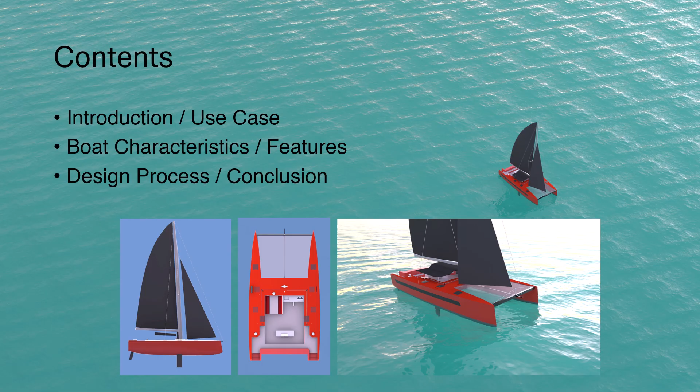Hello, everybody. My name is Graham Denning, and today we're going to be going over my Denning 45 Performance Sailing Catamaran as my final project for Yacht Design 2025. The contents of the presentation will start with the introduction as well as the use case for the boat, then we'll go into some defining characteristics and features of the boat, and then we'll talk about the design process and sort of a debrief and a conclusion.

So I wanted to do a multi-hull. We hadn't done a catamaran this year, and I wanted the challenge. I wanted that design experience, as we've done a pretty good job getting everything else that seemed like the last thing to cap it off. And I've also done a little bit of cruising on a catamaran, and I really enjoyed that and wanted to do my own take on the sort of tropical weekend warrior boat. Some of the boats that I had on my parametric study were the Outremer 45 and the Gunboat 48, which are both performance cruising catamarans, and that was the genre that I was going for.

My use case was a sailing catamaran for extended island cruising or tropical day sailing that small families or two couples could sleep on comfortably for a couple days up to a week. And the ideal user is somebody that can appreciate the art and the sport of sailing without having to have every single creature comfort in the world.

And some of the core characteristics that I wanted to keep central to the boat's design was a very performance-oriented hull and sail package, as well as appendages. A pretty basic system suite, not overly complicated, but enough to be a modern vessel. And then the ability to be shorthanded is also key.

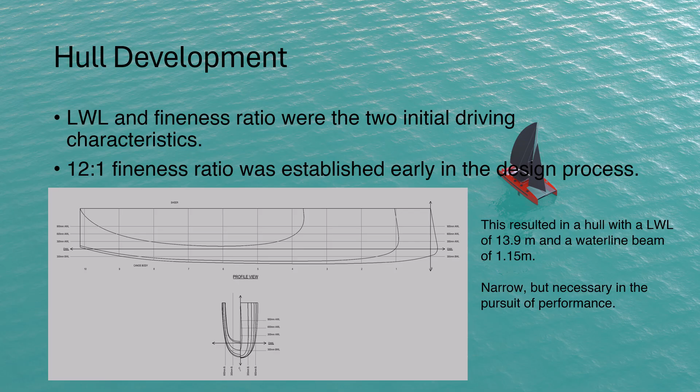Moving into the hull development, the length of the boat, which I wanted to be around 45 feet, and the fineness ratio, which were the two driving characteristics. I decided on a 12-to-1 fineness ratio, as any higher than that, the performance you gain for the interior space that you lose does not make sense for a cruising boat. And this resulted in a hull that's 13.9 meters long with a waterline beam of 1.15 meters. And it's pretty narrow, but as you'll see later in the presentation, it works and it ends up with a pretty high performance ceiling.

For the sail plan, I wanted something large and easily managed for the shorthanding, but also for increased performance. And the key to this is the large mainsail, but also the self-tacking jib on the front, which allows for much easier shorthanded sailing as the jib tacks itself, which reduces the need to mess with jib sheets while you're trying to do 15 other things if you're sailing by yourself or with limited help.

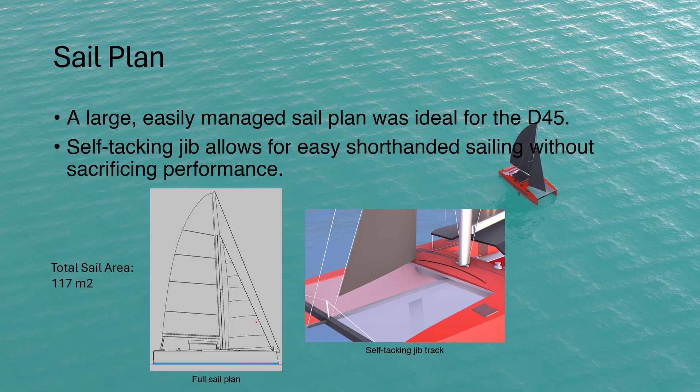The next aspect are the dagger boards, and I chose dagger boards over mini keels as they have a much higher performance ceiling. And each dagger board is operated by lines that move it up and down depending on the current tack of the vessel, and they can also both be pulled up if you are motoring around in shallow water or if you're going to beach the catamaran in order to have a tropical picnic.

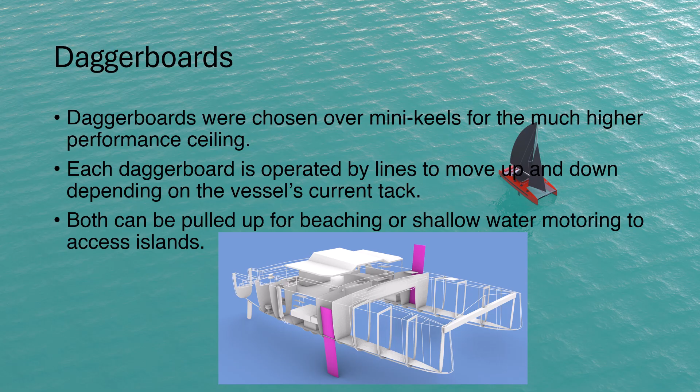Sort of a cool feature that's pretty limited to catamarans is the idea of a rotating mast. And the rotating mast has a wing shape in and of itself, and it offers a lot of benefits for catamarans that can't point necessarily as high as a monohull. It allows for a more optimized sail shape, allowing for much easier airflow. And like the dagger boards, it is also controlled by lines for the specific tack.

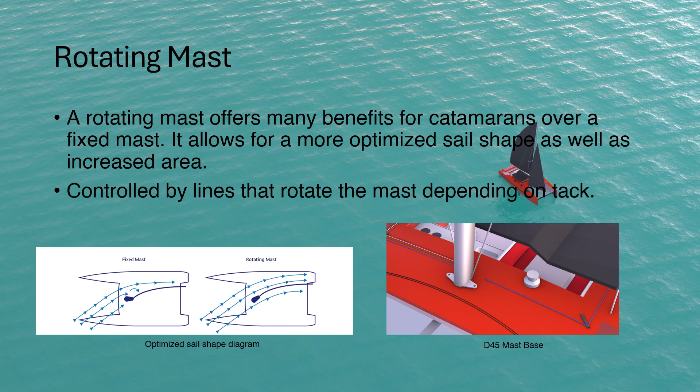For the engines, I picked two Beta 30 horsepower marine diesel engines, one mounted in each hull under the beds, typical shaft drive, accessed under the mattress, and they allow the boat to have a 350 nautical mile range under power, as well as increased maneuverability in marinas with the twin engine setup.

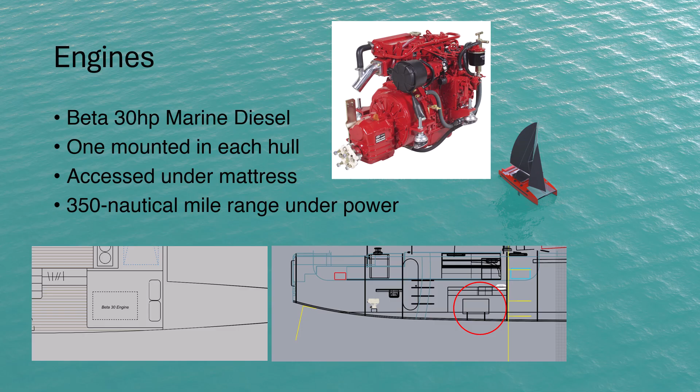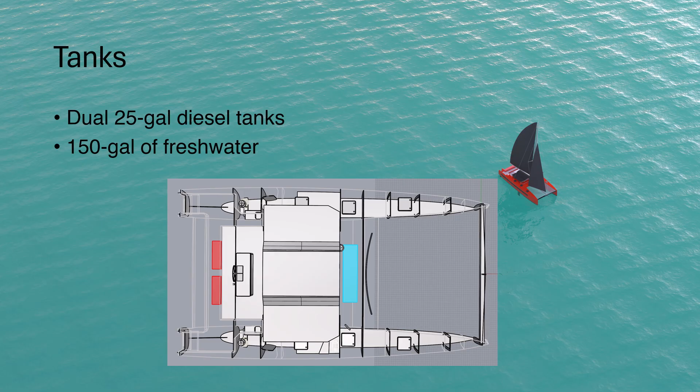For tanks and storage of fluids, we have dual 25-gallon tanks for the diesel, which is located on the back side of the bridge deck in a lazarette, and 150 gallons of fresh water located up front where you can fill it from the deck, which allows for a week or so depending on who's on board and how much water is getting used at any given day.

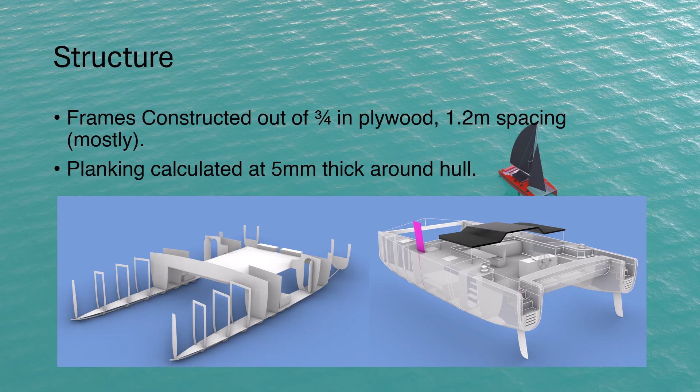For the structure of the boat, it's a wood epoxy vessel, and so the frames are 3/4 inch plywood with roughly 1.2 meter spacing, and the outside planking is calculated to be 5 millimeters all around the hull, and that was calculated with ISO.

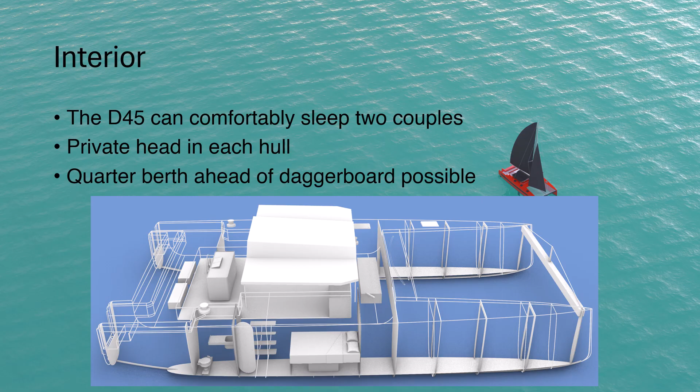The interior of the boat, like I said, was designed to be able to sleep two couples or a family with a reasonable amount of kids. It has two queen-ish size beds with a private head in each hull, and there is the possibility to have a quarter berth ahead of where the dagger boards are stored in each of the hulls, which would be very cramped, but it could give you another space for the least favorite child.

And so one of the interesting parts of catamarans was the specific calculations related to the crossbeam, which were done according to a paper by a guy named A.L. Dinsenbacher, who mapped out a way to calculate the loads under a variety of loading conditions that the boat faces using variables that end up being dimensions of your specific vessel, like waterline length and displacement and all that. And so you end up with these forces, and then the beam and the beam size can end up being calculated. This was by far the most challenging and difficult portion of the project as it relates to catamarans specifically.

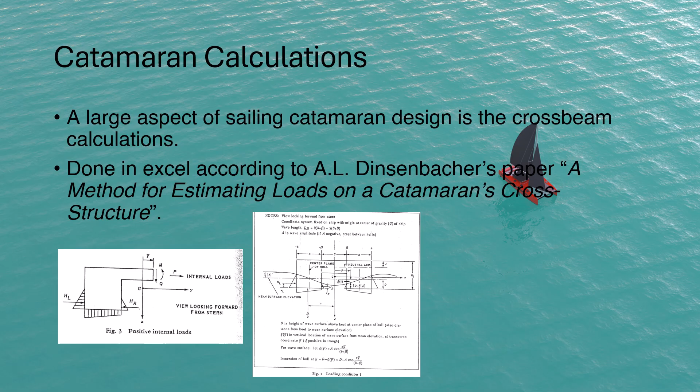We also did some CFD runs, and the CFD runs for a catamaran are pretty cool because at the max righting moment, it starts lifting a hull out of the water, which gives a really cool visual, not only sort of in person, but also in the CFD software, where you can see it's flying that port side hull on the left image, and you can see on the right image the dynamic pressures under the water on the dagger board and the rudder, as well as sort of on the bow.

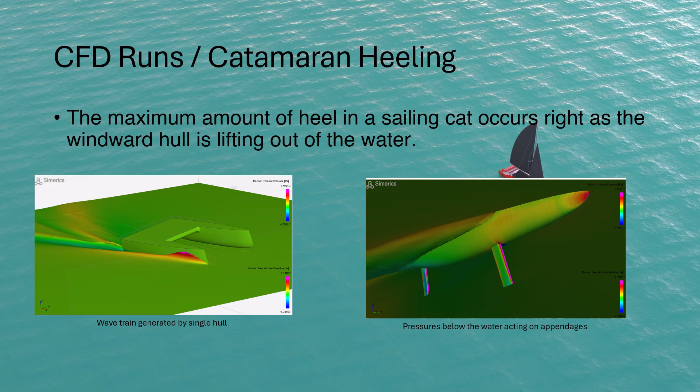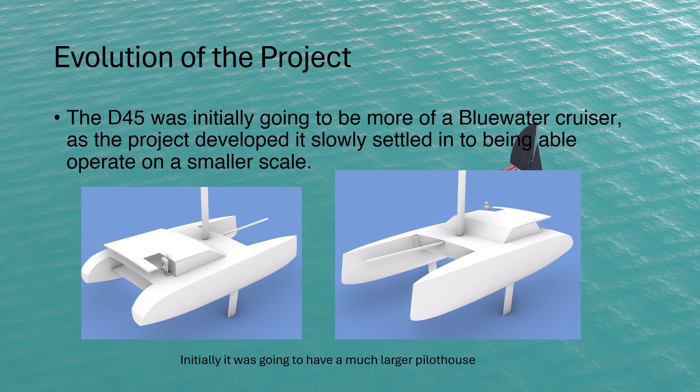And the project evolved considerably over time. It was originally going to be a much stouter blue water cruiser, and as I developed and sort of settled into the design spiral, I wanted to narrow in the scope to being the tropical weekend warrior that I ended up with as my final project.

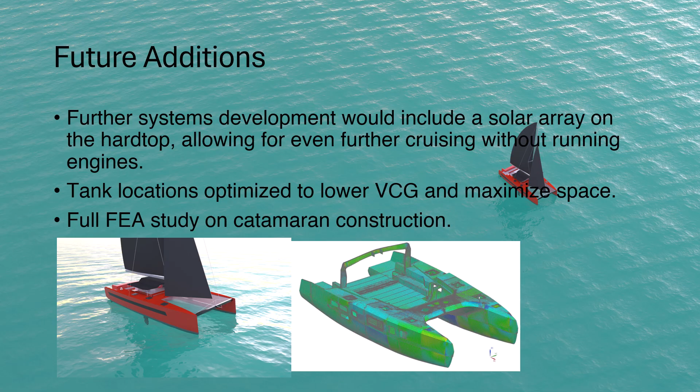Some future additions that I would like to have seen on the boat and could possibly work on in the future would be mapping out the electronics for a solar array on the hardtop, which would allow for you to operate all the systems on the boat without having to run your engines at all, which would be ideal. And moving around the tanks to lower the VCG would be nice, as well as doing a full FEA study using the beams that I calculated would be a really cool visual for the boat, and you can see how it'll perform.

And so some things that went well and some things that went not so well. The whole design portion of the project definitely was the smoothest. And then some of the challenges were making efficient use of the space. I'm not particularly skilled at doing interiors, and the hulls and the bridge deck were very narrow and very shallow, and we got it in there, but it was a struggle for a little bit. And then I could have benefited from a little more time to sort of sit and marinate with the beam calculations, as it was a lot in a pretty short amount of time, but I'm happy with how it ended up.